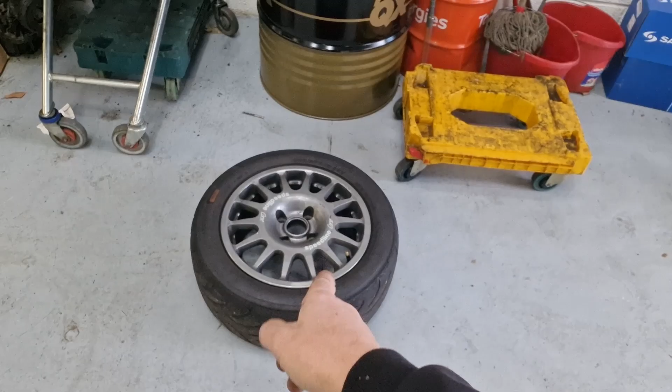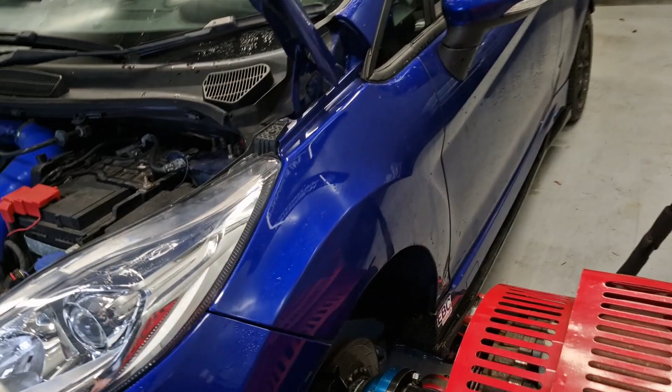Right, we're going to gloss over the fact that I've been absent for 18 months, but here I am down at Rsport Performance. I had my car on the dyno corner. The only reason I came down here was to pick up some wheels and test them over my brakes. Normally with the Team Dynamics I was running a 25mm spacer, but with these we can get out to 15 - we could actually go 12, but then I'd need longer studs. I'm going to take them off him and look at it. I know I can at least run a 15mm bolt-on, which is a lot better than the offset I was running with a massive 25mm spacer.

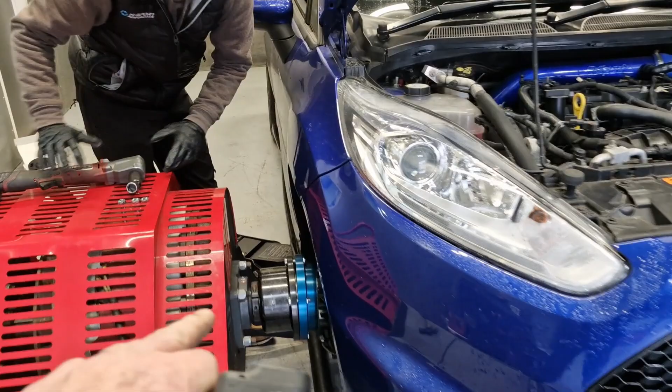So what are you up to then, Con? Getting the car on there - it's got a shitload of camber, so it makes my life a bit more difficult, but all good, we're getting there. Does that adjust? Yeah, it's got suspension on the back which will allow for camber, but mine's quite a lot, 3.5 degrees, which is a fair amount on a front wheel drive car. You can make it work though, right? We can make it work. Good, what's it go like?

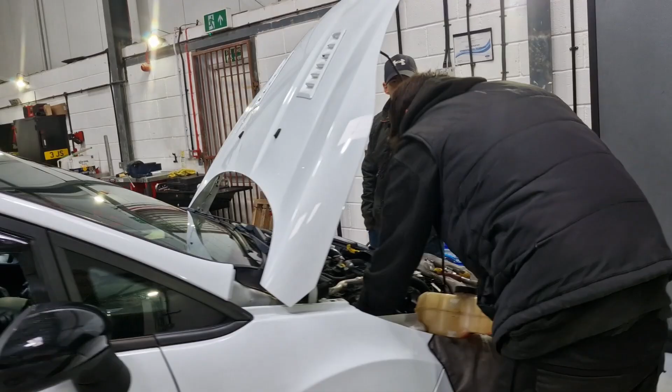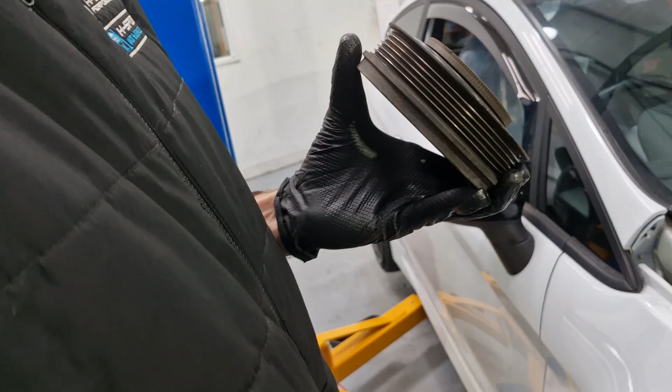Right Jordan, hello sir, what are we doing then? Cam belt. But unfortunately, as with everything on Ollie's car, what can go wrong goes wrong - the pulley was seized on so much it pulled the rubber bushing away from it. So we're just fitting a new one - got a brand new one down there. So the world famous Rsport cam belt's being done.

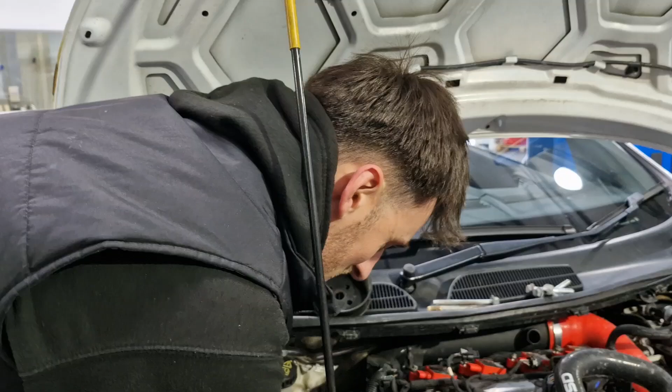Get it done once and right. Exactly. It'd be a lot easier to film if Connor would shut up with that ratchet gun, wouldn't it?

Alright, so the plan is, as I said, I came down here for wheels and I've ended up on the dyno. Thank you very much to the boys here for giving me the time to come on - it's never been run on the dyno since I did the map myself. I'm now on low boost, under 1.5 bar top end, which is a lot safer for track. What we're going to do is run the map I've done on it, then run my old 1.8 bar map and see what the power difference is. Even though I don't want to go back to 1.8, we'll do it for a bit of science and see what it comes out at.

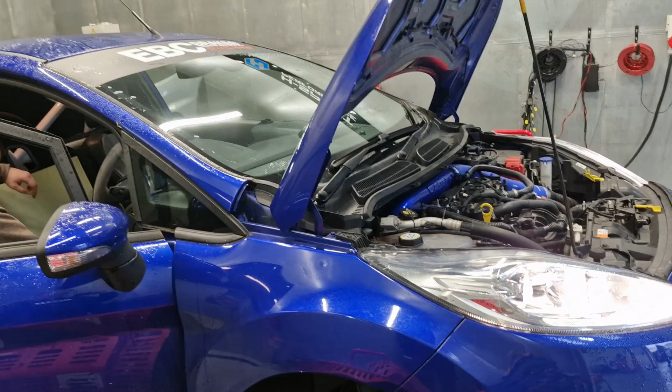Connor's just getting the laptop ready - he's going to data log for me, and I've already told him to be gentle because this is my map. I'm not a professional mapper, but it hasn't blown up in 2 years - well, it hasn't been driven for 18 months of those 2 years. Actually it did have spark done, and I think it did a couple of track days before that. So this is 1.5 bar peak, tailing off to about 1.4 at the end, as I said - I kind of didn't want to go over 1.5.

Alright, doors going down, we're locking ourselves in. Obviously I keep my car very clean, as you can see. He's gone to Greggs - I had a Greggs breakfast on the way here this morning. I had to get up really early for it.

It's because the hub's essentially like that. Yeah, because of the extra camber, it puts more vibration into everything.

Right. On another note, what do you think of my padded baby seat? Well, I feel like you've copied this from Ravi, haven't you? No, I copied that for myself. I wonder if Ravi copied. Ravi does copy off me. I haven't seen Ravi do it. I did it when I went to Spa. Ravi's one has got some medical grade memory foam on it. It's pretty impressive. I'm gonna have to get some of that then. Ravi, I need some memory grade thingy.

Right, let's give her a go then. Come on then. What's your warranty if you blow my engine? With your tuning, Steve. Yeah. I take full responsibility. Right, ready? Let's go.

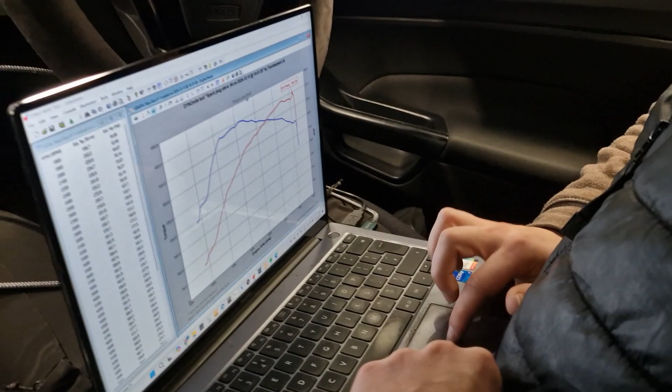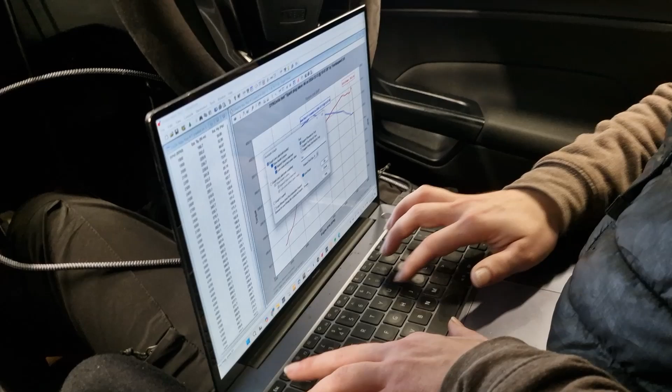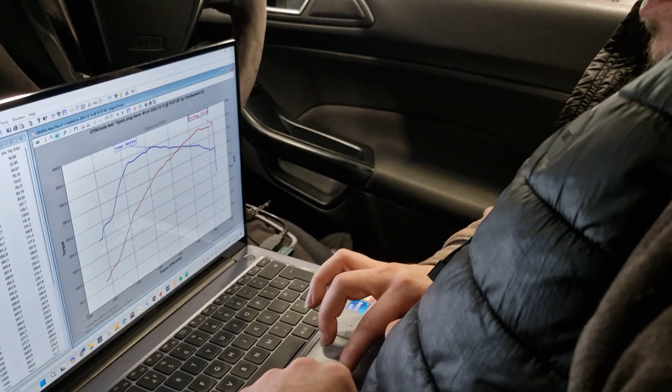1.5. Well, I'm happy with that. That's pretty good. 300 is where I was thinking. To be honest, I thought I'd come in with about 290. Mind you, it looks a bit scruffy at the top end, doesn't it? Yeah, I don't know if that's just how you've set the red line. Got any sort of limiter on it? It soft cuts at about 7.3 and hard cuts at 7.4. Well, full cut like so.

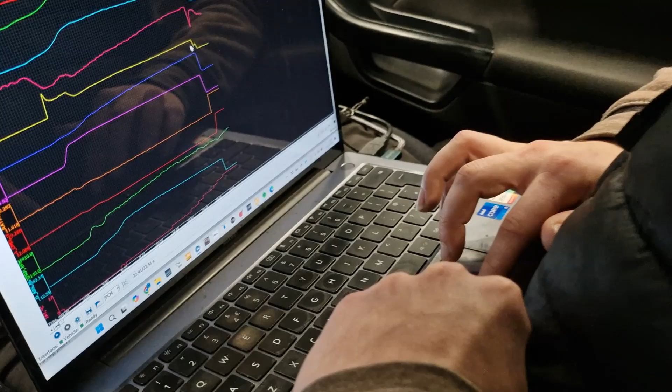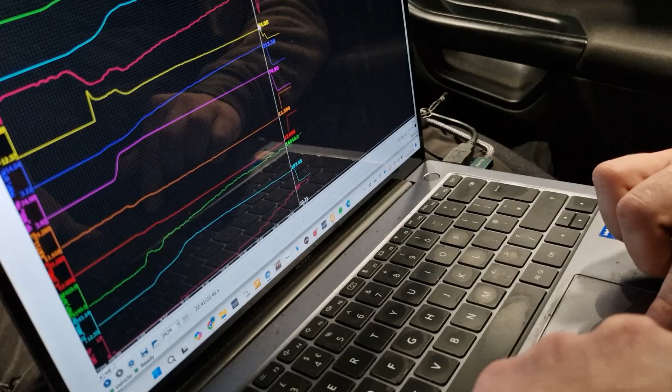Log looks pretty good. 18 degrees peak. Tails off to just under 1.5 bar. 1.5 bar mid range. It's pretty good. Steve, you've done a good job. Well, thank you very much. Yeah, like you said, right at the top end, it climbs on ignition. About a degree. What RPM is that? That is 7.2, 7.3. Yeah, 7.3. Right on, looks good.

Fuel pressure's okay. We've got injectors, haven't we? Yeah, bigger injectors. I don't need them for this boost level, but that's good. Oh, hang on a minute. We've got to do a meth run. So that was meth on. Yeah, so we'll do one later with it off. You might find that was what that little dip was at the top, because it kind of flatlines the ignition.

So I've got the ignition set so whether the meth is on or off, it cannot add any more timing, and I put the meth on for safety, so it is completely capped. So what should we do? One more. Leave the meth on. Yeah, we'll do another run, just see if that top end is any different. Because potentially the water injection can actually lose you power if you've not advanced ignition timing. Ready? Yeah, let's go.

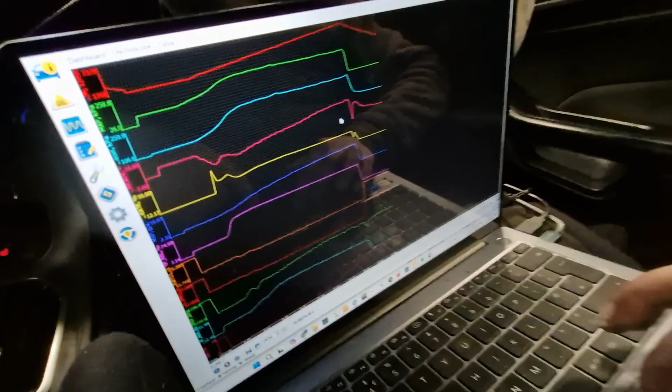There you go, so that time I actually hit the limiter properly. So there's no weird climb on the ignition. It's a bit smoother. Do you know what's interesting as well? When I've done the map myself, you can be as critical as you like and it doesn't really matter. So that run was more as well. 311.5. 311? Torque was a little bit less.

Is that just because it's warming up? Usually the first run is a bit lower. Yeah, usually it depends what your intake temps and stuff like that are. It depends on weather. We've got a lot of variance. Well, I'm even more happy with 311. Yeah, it's good. Shall I switch meth off? Let's try it.

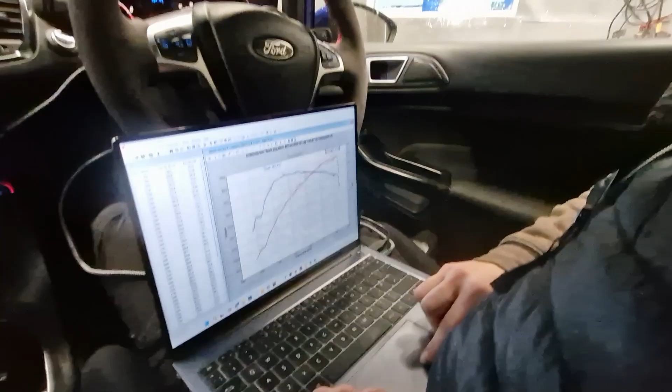So I've got a switch down here for my meth, and then I've got the little green light on there. So ignition timing wise, it should make exactly the same. There shouldn't really be any difference at all. We're hitting the same peak then, 18 degrees. Yeah. It just made it smoother, which meant the top end was smoother as well. It does climb a little bit, but it's very marginal. Ignition timing should not climb any more than 18.

It may make a couple more. Well, it doesn't make a difference either way. It will just make it more consistent. Everything's going to be just better. Temps are lower. Even after that run, the intake temp is still 10 degrees. 10 degrees, climbed to 18, so that's not bad in a dyno room, is it? Really good. Right, so this is water meth off, yeah? Yeah, water meth off.

You're absolutely right. I'd say the ignition's not quite as nice. A bit scruffier, a little bit scruffier. Not scruffy, but it's just not as smooth. Basically, just before 6k, before it flatlined at 17, 18 degrees, whereas now it's still climbing. Yeah. But yes, it's certainly not bad.

But somehow it made more power. So you're absolutely right. So what we got? 321.5. 321. Which is really efficient at 1.4, 1.5 bar. Yeah. So with water, I knew that running the water would lose me about 10 horsepower is what I thought. Well, it's good to have that test.

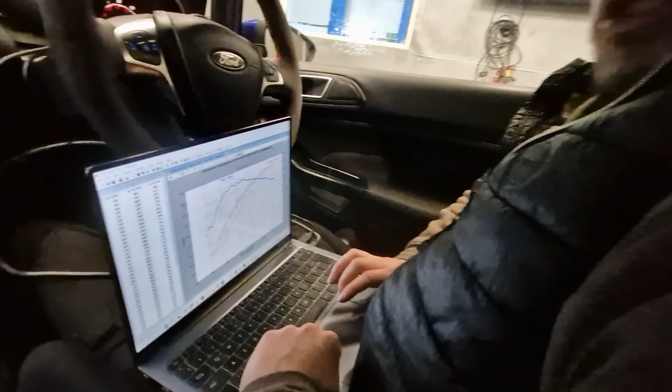Now we could mess around and I could up the ignition and make a lot of power on meth, but there's no point. I just want a reliable track car. That's really good. So 321.5 brake and 394 newton meters of torque. So that's really good. Yeah. So torque wise now, the way I've done the map and the way the car feels, it feels like it's not very strong on torque, but that's kind of how I wanted it.

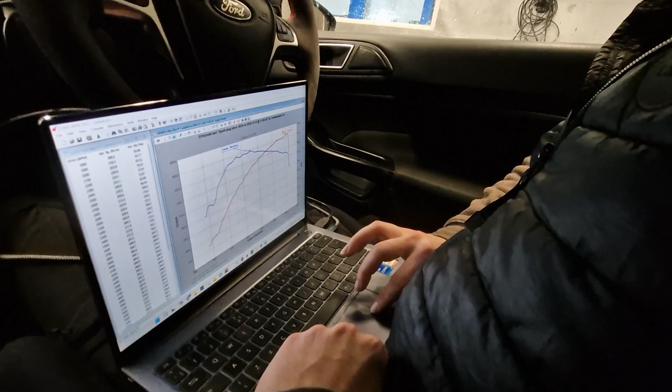Now, what is 394 in foot-pounds? I'm not sure. Somebody work it out for us. Don't do anything in foot-pounds. It's about 300 foot-pounds. Yeah. Oh, that's all right. I'm happy with that. Right, so that's good enough then for my map. So what was it? 321.5 and 394 newton meters of torque.

We're going to do one more run just before we close the video, just to check for averages. Yeah. But really, also, really positive. Should we run my old 1.8 bar map just to give it a go, for science sake? See what that one makes, how it compares.

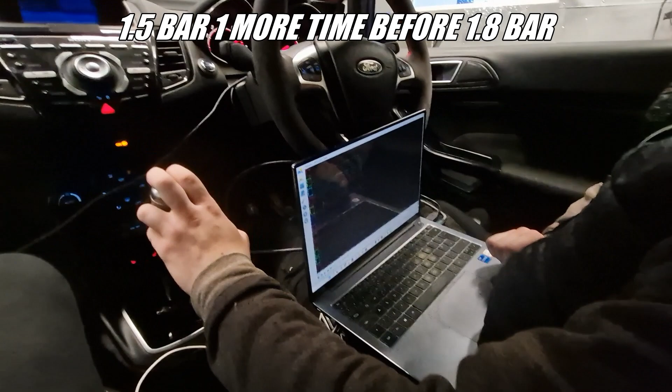Thing is as well, when you're trying to do the map yourself and you've got to do it on the road, it's a little bit tricky. You do run after run and it probably needs a little bit more time to actually smooth it and make it perfect. Yeah, but I'll tell customers exactly the same. Tuning a car on the road is better. We like to finish off on the dyno more than anything.

320.1. So 320.1. Really, that's good. Really consistent. Means even without the meth, all of the modifications you've got on the car are doing their job. Intake temps are exactly the same as the first run. Yeah. Starting at 11 degrees and finishing the run at 18 degrees.

So 18 degrees. And that's the other thing as well, we can't see any changes in intake temps based on meth on and off because it's after the sensor, which is another problem I may have talked about before, but it's definitely running cooler in the engine, but I can't monitor it.

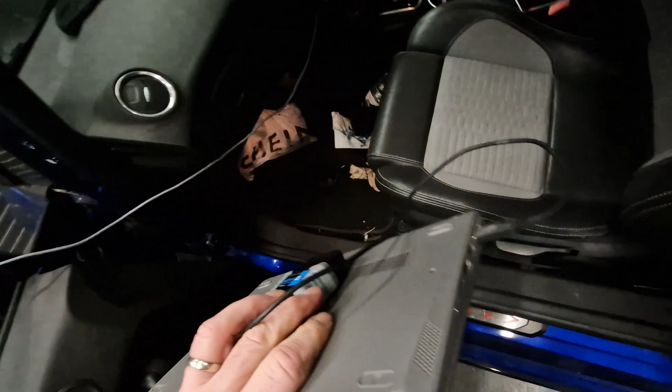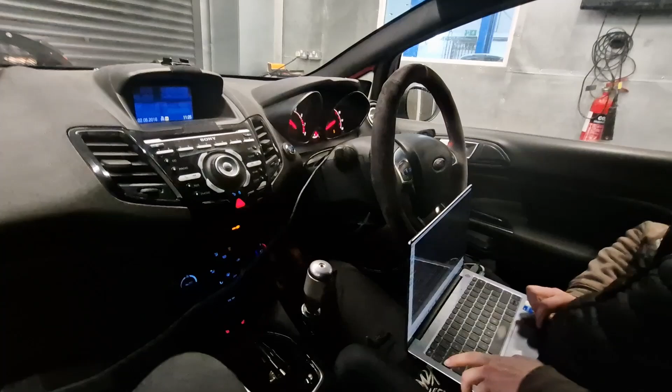Do you know what? If it does make more power... She's made a big fuel pressure dip in mid-range. Is it? Wow. That was huge. So it made more power. It did make more power. What did it make? 339. That's actually a bit more torque as well, just over 400 newton meters.

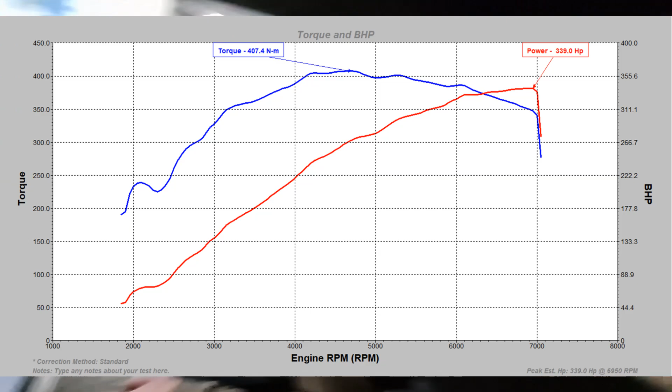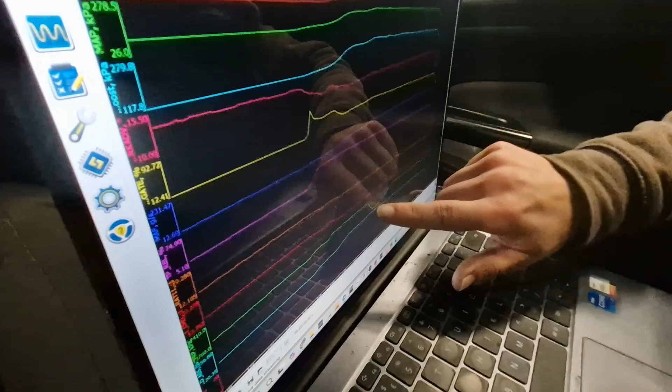Yeah. But you know what though? I'm happy to trade off that power. But that fuel pressure dip. Just point it out, Con. Put your finger there. Oh, you've got the cursor on it. Yeah. That's big. It never did that on a log before. I wonder if it's just...

You could have a weak low pressure fuel pump, high pressure fuel pump, or it could just be adaptions because we have literally just loaded the map on. Yeah. So do another couple of runs. I would like to do one more run, and we'll be very cautious about the mid range. Yeah. But not ideal. Ready? Yes, go.

1.8 bar, meth off. Fuel pressure. Dipped again, did it? So we are having fuel pressure issues. Yeah, I mean, it's doing it at 1.7 bar, so... It never used to do that, so obviously I may have developed a little bit of a fuel pump issue. Have you ever replaced the high pressure pump? It's not on the original one, but I don't think it's a brand new one.

Do you reckon it could be losing fuel pressure because of bigger injectors? Yeah, but usually the larger injectors will usually drop at low RPM as opposed to mid-range. Whereas yours isn't doing that, it's doing it mid-range. Right. So your fuel pressure for the most part is fine coming on to boost, it's just dropping randomly. On the previous log that we did, it did recover, but it's just not ideal.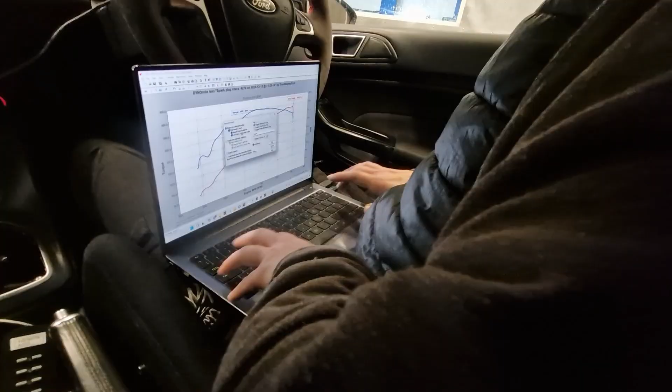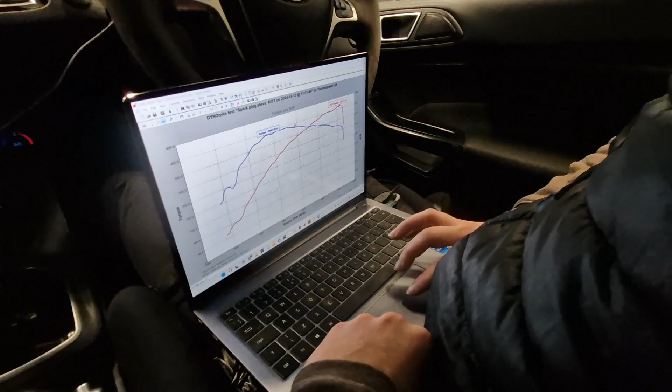There you are, so everyone can see. Still though, I'll take the 320, 1.5 bar. So that one was 320 brake, 394, so that's 1.5 bar, no meth. So meth off. So for me realistically, what was it, 310, 311? That's what we started with. So that's what I'm running on track. So I'm happy with that. That's consistent, because the intake temps are really nice. And I think with our meth, I probably could make that lap after lap after lap. It'll be really, really consistent power. And that's what you want for track. It's all good making the peak power, but if you can't make it consistently, what's the point? Yeah, exactly. Very happy with that, I am.

Alright, so that's it. That's my time done at Rsport. Pretty happy with the results. Got a bit more out of the banger. I thought it was coming down just for wheels, but we had a bit of science as well.